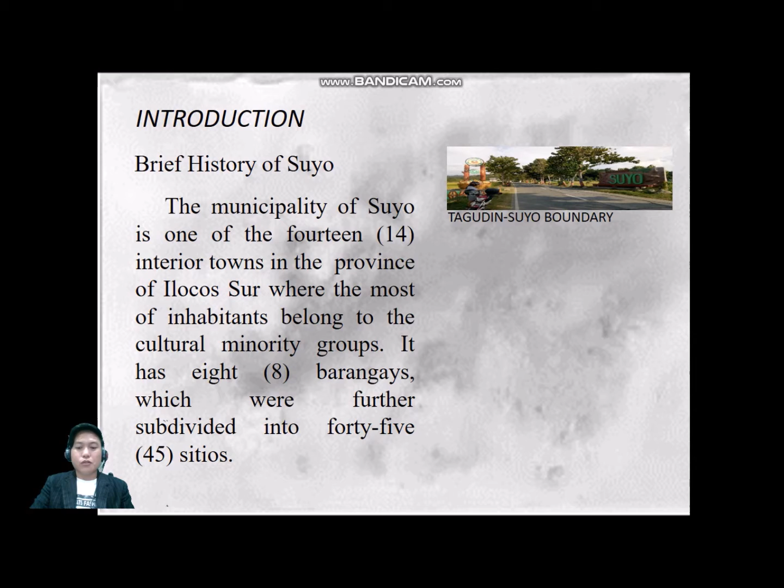But first, I will give you a brief history of Suyo, Ilocos Sur. The municipality of Suyo is one of the 14 interior towns in the province of Ilocos Sur, where most inhabitants belong to the cultural minority groups. It has 8 barangays which were further subdivided into 45 sitios.

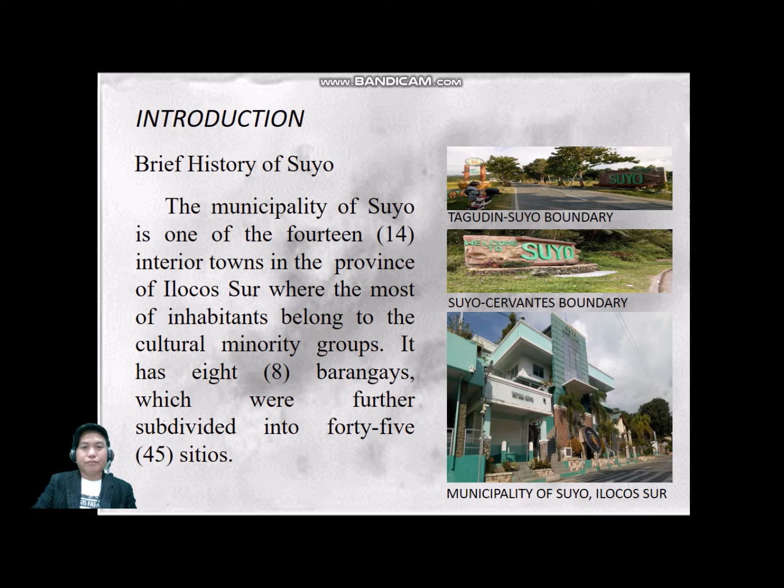Namunganayan is an Ilocano word for origin. It is the term used to celebrate the yearly town fiesta called the Namunganayan Festival, where different barangays in the municipality participate. It is an event where the native Bago tribe show their culture, tradition, and arts.

The project entitled Namunganayan Eco-Cultural Sports Center: Integration of Human Science, Nature, and Arts, is a place where athletes of the different school divisions and tourists are merged together in one place for sports competition and entertainment, and for tourists to discover and know more about Bago tribes, arts, and culture.

This project is designed to promote sports excellence, encouraging both amateur and professional athletes with its new facilities and training environment. It can help every athlete in training hard and improving their skills for higher competence in global and national competition.

Design focus. The project aims to provide a sports center that will house sports facilities with an application of the innovation of biodesign, architecture through nature, science, and creativity, with a secondary approach of passive cooling and active ecological restoration. Passive cooling aims to maximize natural ventilation, minimize energy consumption, and reduce carbon footprint produced by artificial ventilation such as air conditioning systems.

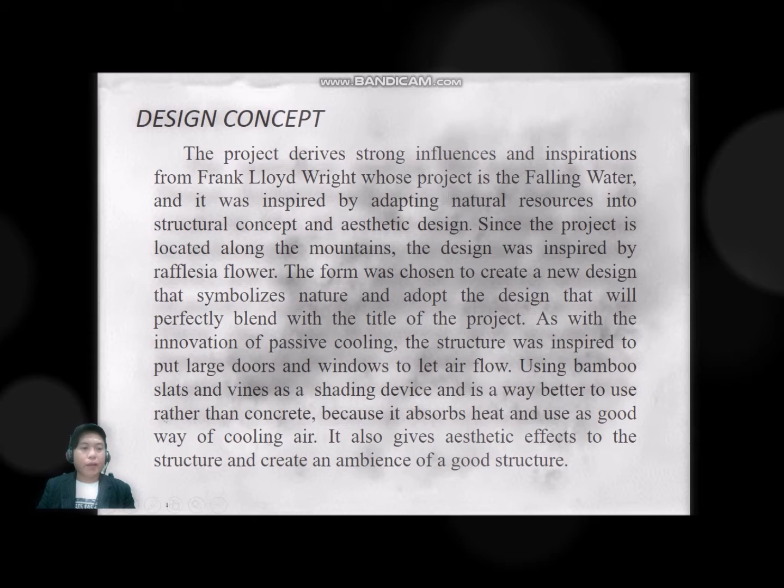Design concept. The project derives strong influences and inspiration from Frank Lloyd Wright, whose project is the Falling Water, inspired by adapting natural resources into structural concept and aesthetic design. Since the project is located along the mountains, the design was inspired by the Rafflesia flower. This form was chosen to create a new design that symbolizes nature and blends perfectly with the title of the project.

As with the innovation of passive cooling, the structure was inspired to put large doors and windows to let air flow, using bamboo slats and vines as a shading device, a better option than concrete because it absorbs heat. It is a good way of cooling air, and it also gives an aesthetic effect to the structure, creating an ambience of a good structure.

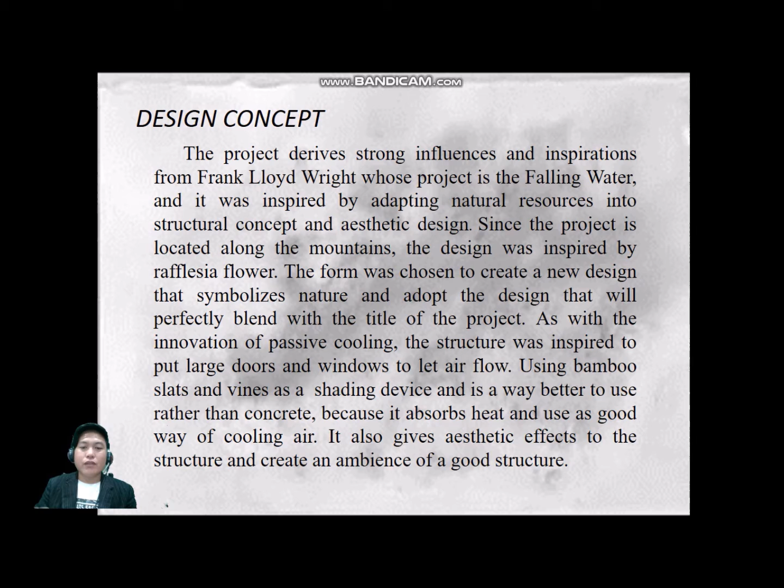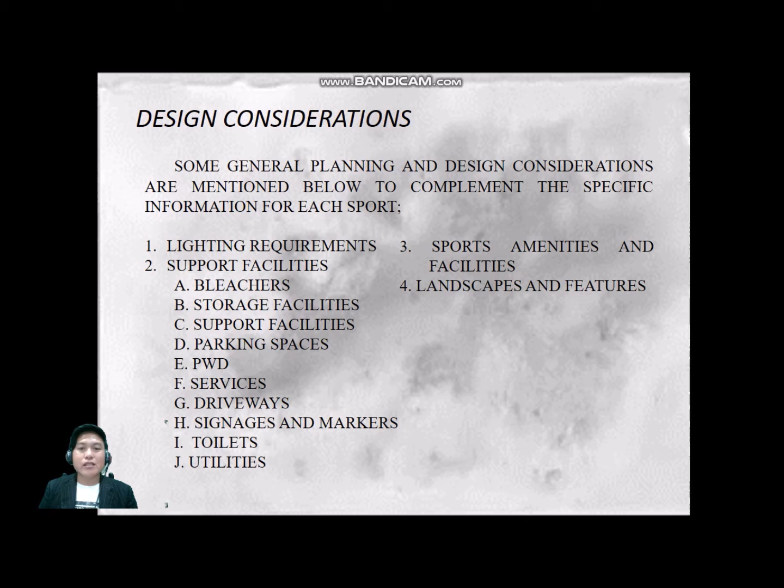Design considerations. Some general planning and design considerations are mentioned below to complement the specific information for each sport: Number 1, lighting requirement. Number 2, support facilities, including bleachers, storage facilities, parking spaces, PWD toilets, services, driveways, signage and markers, toilets, and utilities. Number 3, sports amenities and facilities. Number 4, landscape and features.

Design strategies. Using bio bricks or bio blocks for exterior and interior walls helps eliminate heat and produce a cool atmosphere inside the building. Large window glass with louvers above creates better lighting and helps provide natural ventilation. Using ecological materials like stones can lower the huge demand for housing, creating a shortage of conventional building materials.

Design philosophy. The design must reflect the practical and aesthetic in business, but above all, good design must primarily serve people, by Thomas J. Watson.

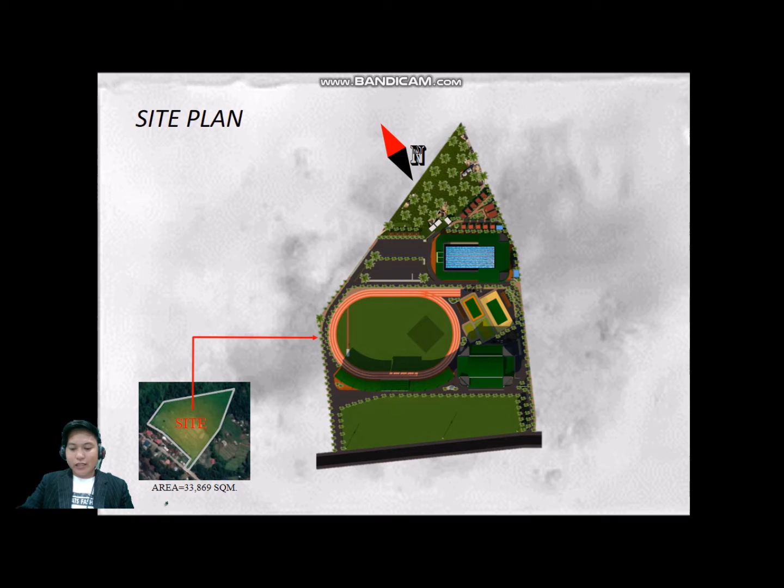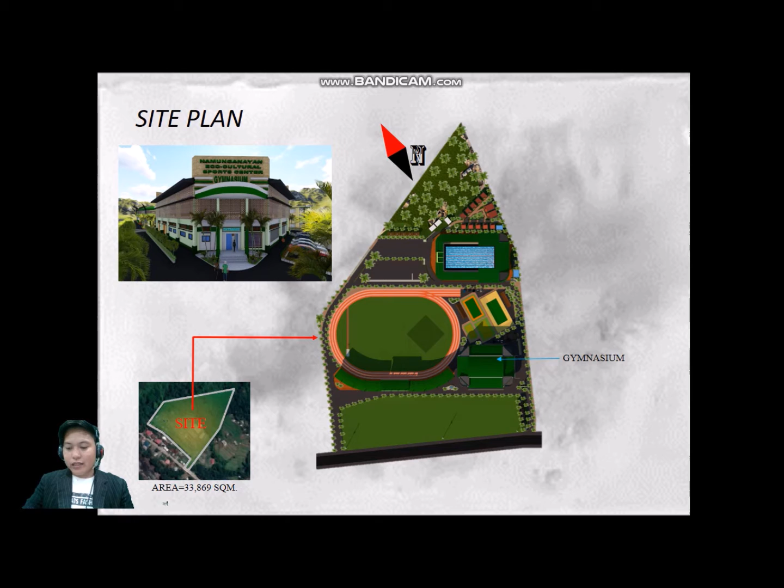Site Development Plan. The site development plan is arranged according to user behavioral analysis. The main entrance is located in front along the highway. As you continue going inside the sports center, you will see a water feature with signage of Namunganayan. The gymnasium is located near the entrance with a 4-corner entrance because it is the most used facility, and at the right corner is the admin building.

The stadium is located behind the gymnasium, facing northeast to prevent the heat of the sun while it reaches noontime. Facing northeast is also beneficial to the residents near the sports center. Trees between the site and residential areas are also placed to absorb heat and serve as noise reduction and insulation.

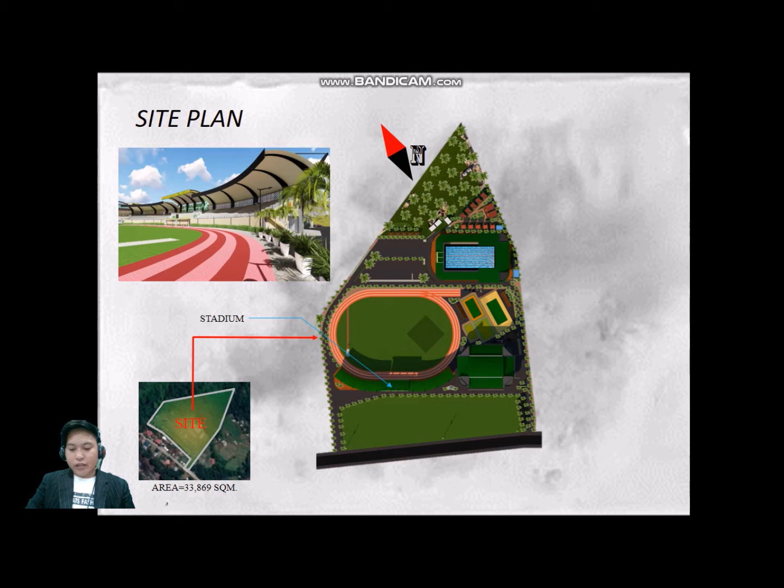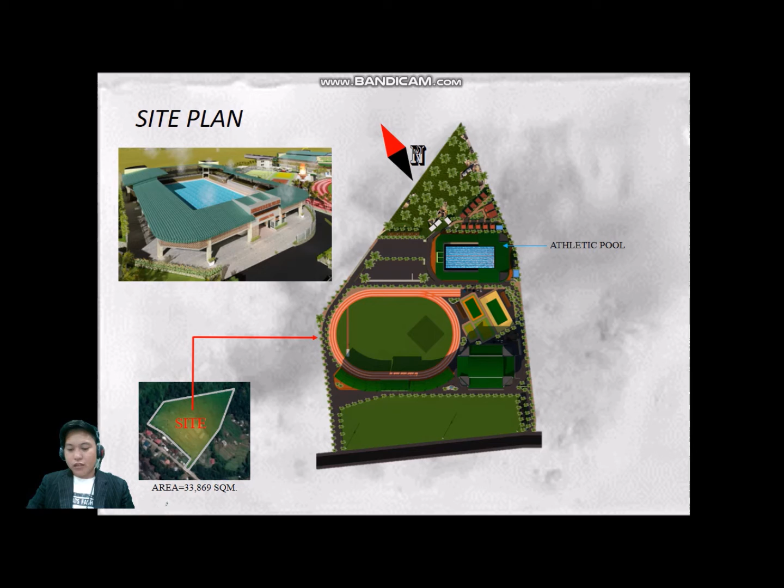Courts and fields are located at the middle part of the site. Athletic pool is located at the upper layer of the site, and parking spaces are centralized to prevent walking hazards for pedestrians. Cultural village and cultural park are located at the third level of the site, far away from active and crowded spectators. Water tank is located at the highest point of the site to supply water needed without using technologies, reducing energy consumption. Driveways are located along the sides of the site for the safety of pedestrians.

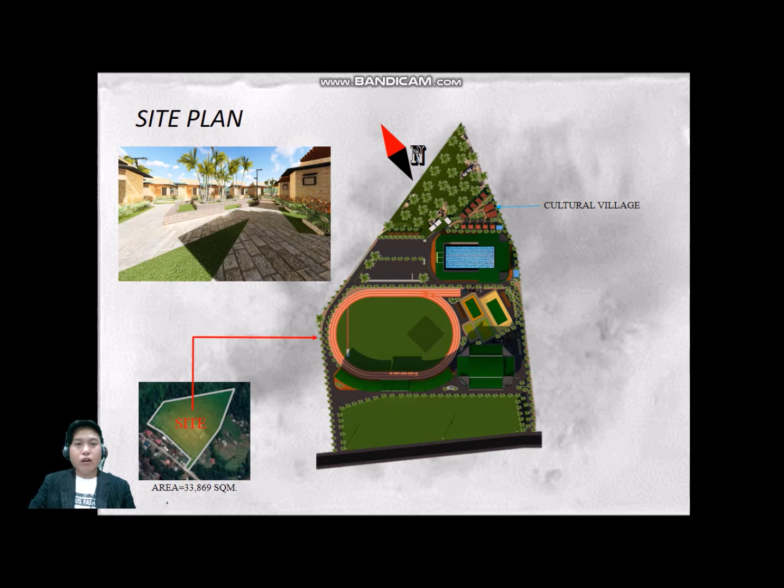This is my site analysis.

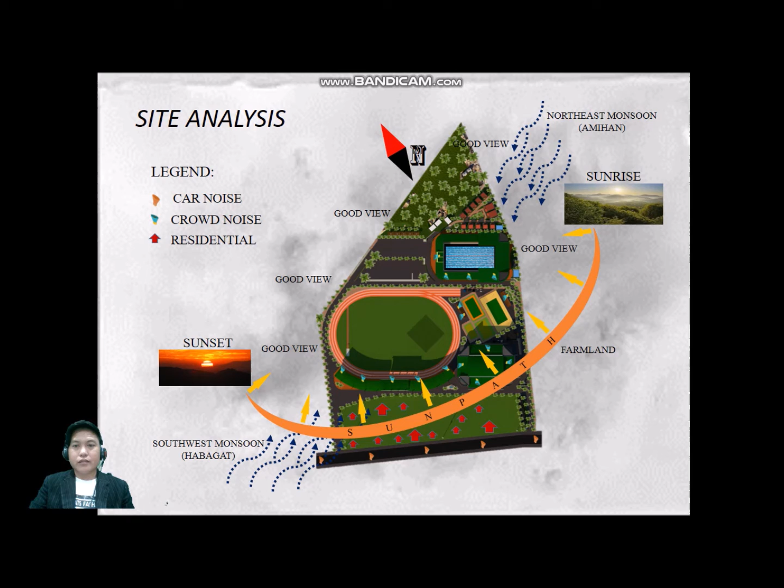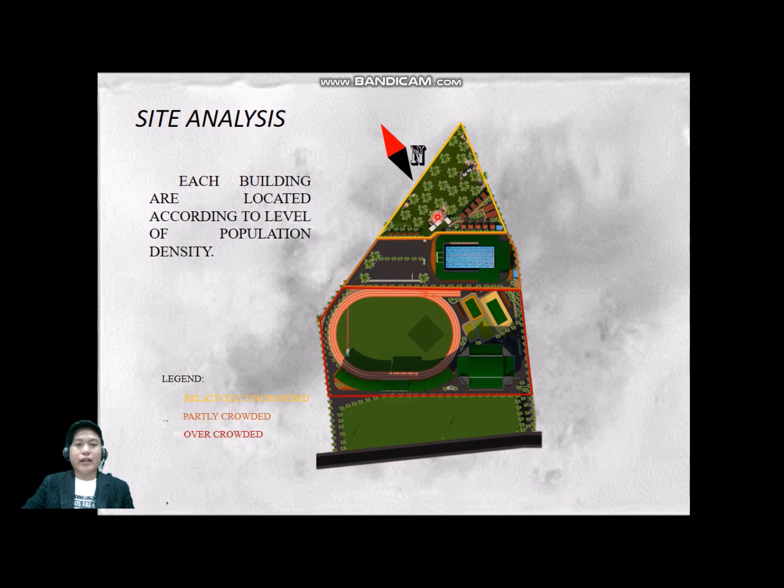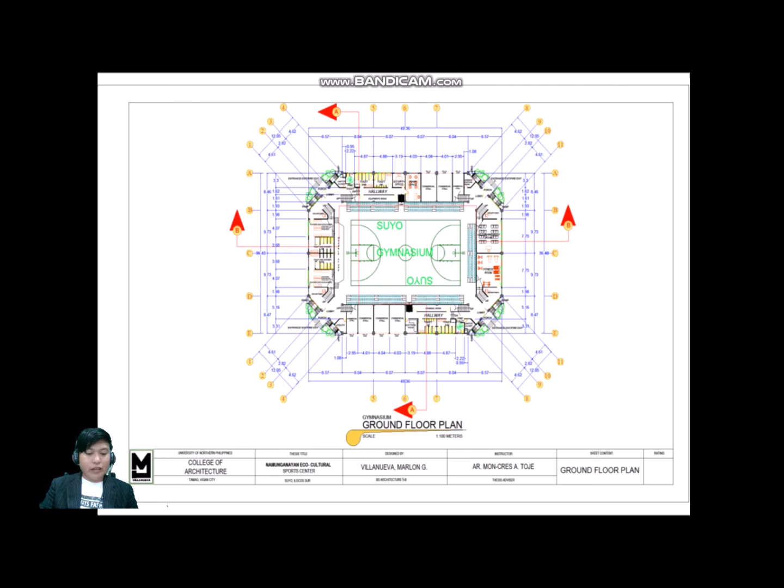Now let's proceed to the floor plans. First is the gymnasium ground floor plan. We have here 4 main entrances that also serve as exit and fire exit. Below the bleachers, we have commercial spaces, office, storage, toilet, fitness room, breakout room, locker room, lobby, utility, control room, electrical, and janitor room. We have also movable stage, telescopic bleachers, and a standard size basketball court. We have also 2,500 seating capacity bleachers, including the upper bleachers.

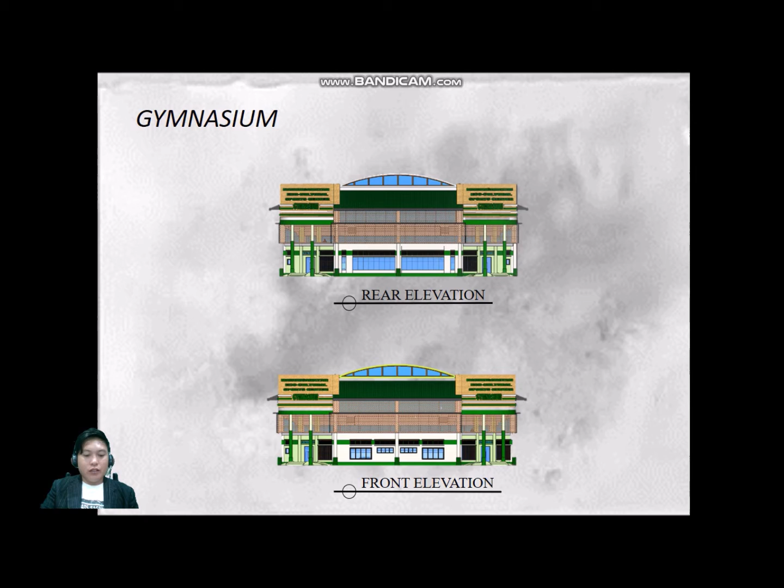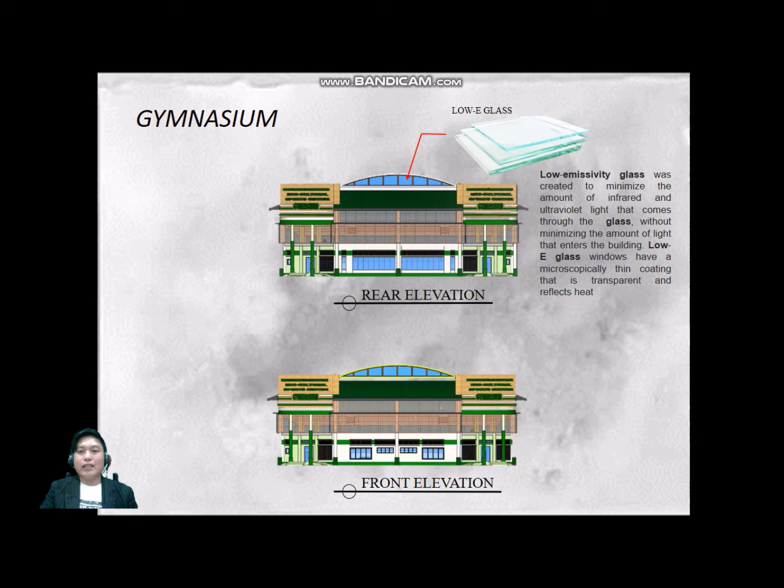Now let's proceed to the elevation. In here, it shows the materials and innovation used in the building. The first material is low-E glass, or what we call the low emissivity glass. This was created to minimize the amount of infrared and ultraviolet light that comes through the glass without minimizing the amount of light that enters the building. Low-E glass windows have a microscopically thin coating that is transparent and reflects heat.

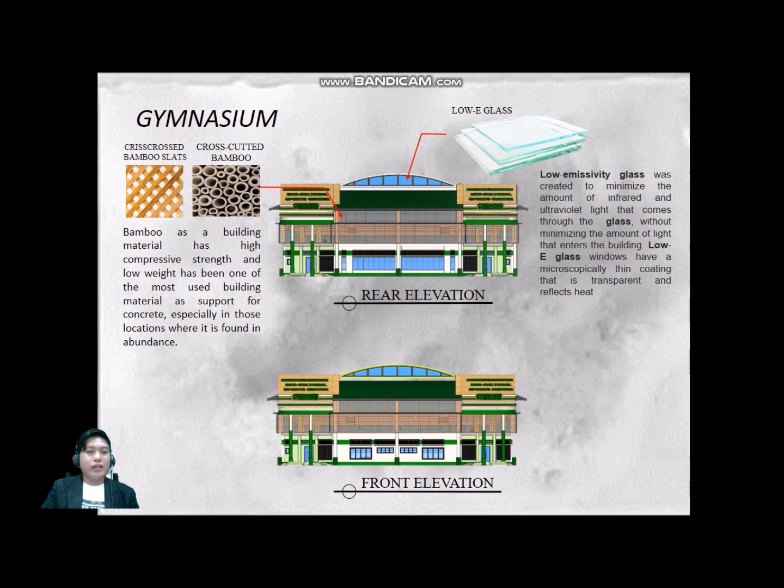The second material, and part also of my innovation, is the crisscross bamboo slats and the cross-cutted bamboo. Bamboo as a building material has high compressive strength and low weight, and has been one of the most used building materials as support for concrete, especially in locations where it is found in abundance.

The third material is bioblocks. Bioblocks also regulate moisture very well, absorbing and retaining excess moisture that they later release, thus regulating the natural climate of interior spaces. Further benefits of bioblocks are 100% sustainable, 100% recyclable, and 100% natural and bio-based.

The fourth material is natural stone bricks. Stone bricks offer greater insulation and temperature control. It is usually found along the river.

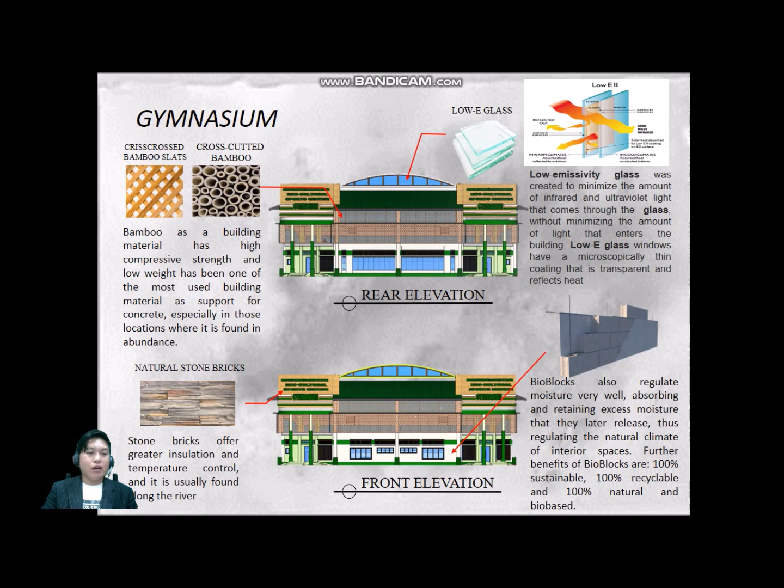I use crisscross bamboo slats. Crisscross bamboo slats are attached to a wooden frame and used as a shading device, insulation, and noise reduction device. It also gives an aesthetic view of the wall. Cross-cutted bamboo is also attached to a wooden frame. It works the same way as crisscross bamboo slats.

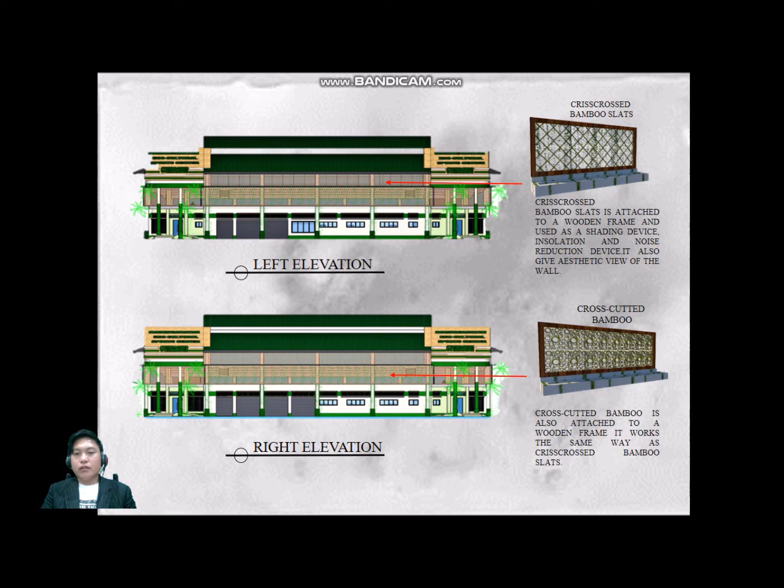And this is gymnasium perspectives.

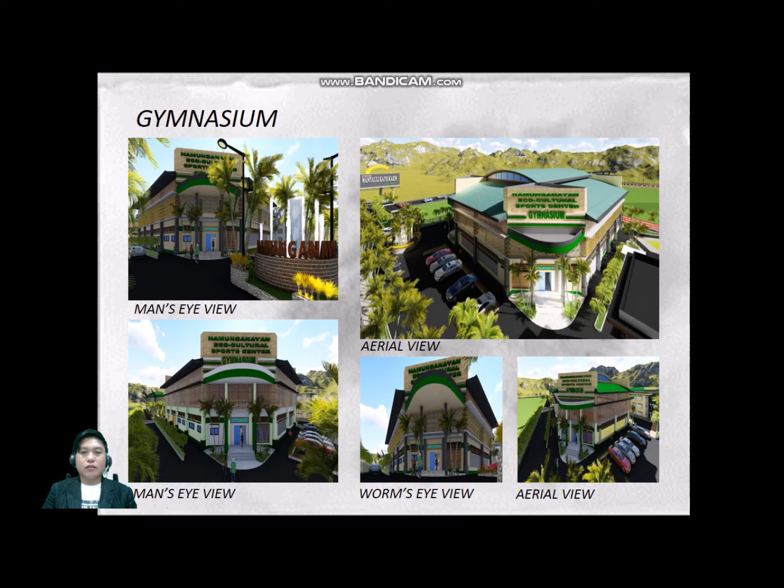Now let's proceed to the stadium floor plan. Ground floor is composed of lockers, toilet, electrical, storage, control, garbage handling area, office, utility, and stair. We have also dance room, music room, billiard and pool room, chess room, and table tennis room. On the middle part of the bleachers, we have stage, backstage, and dressing room.

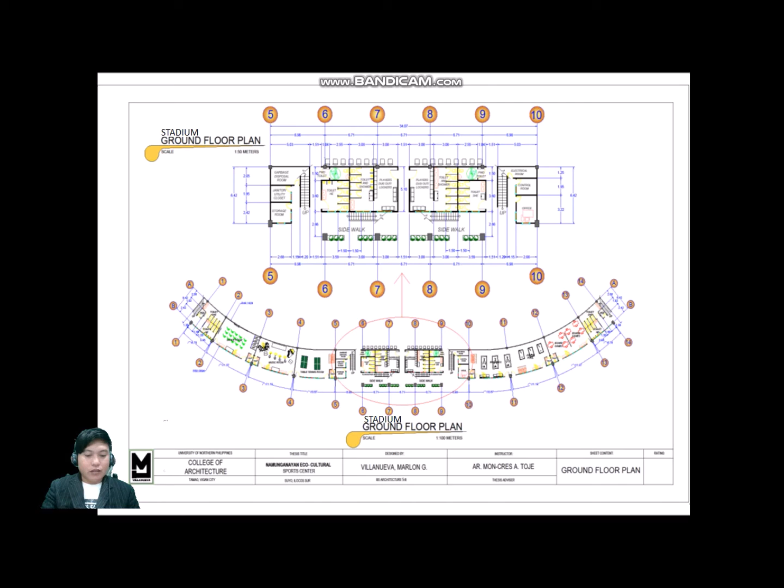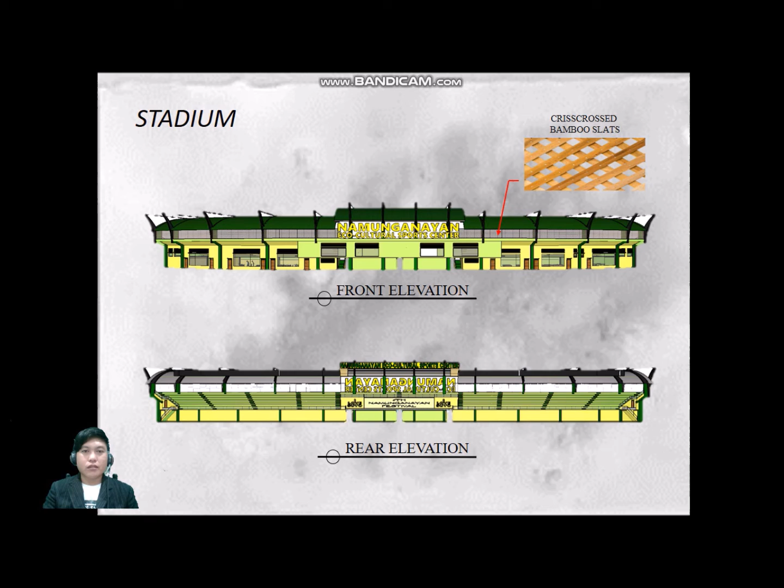In here, I also use the same materials and innovation that I use at the gymnasium. I also use crisscross bamboo slats attached to the beam, as blinds. I use also low emissivity glass. I use also wooden louvers.

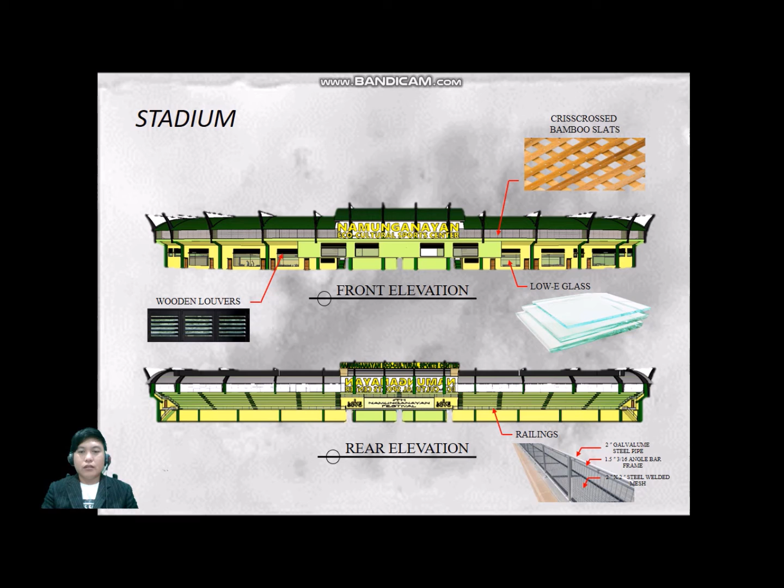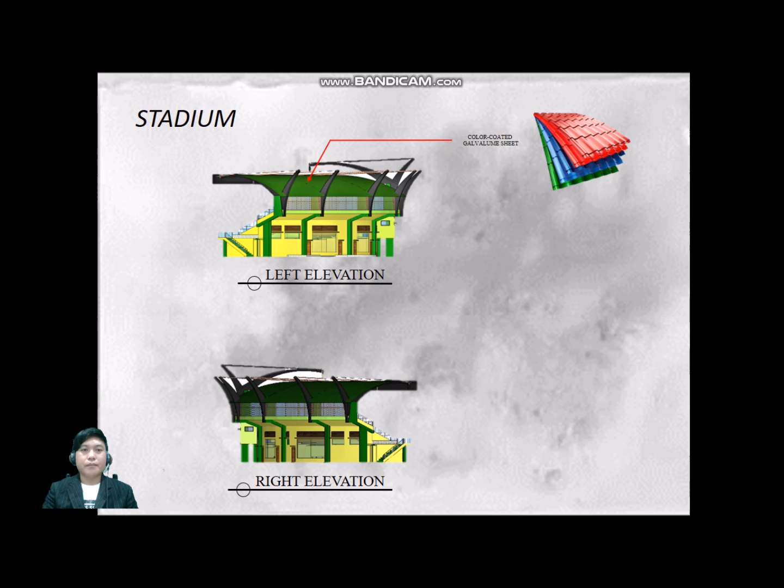Color-coated galvalume sheet, or a pre-painted galvalume sheet. Customized high-strength I-beam for the truss. Galvalume steel pipe. And crisscross bamboo slats.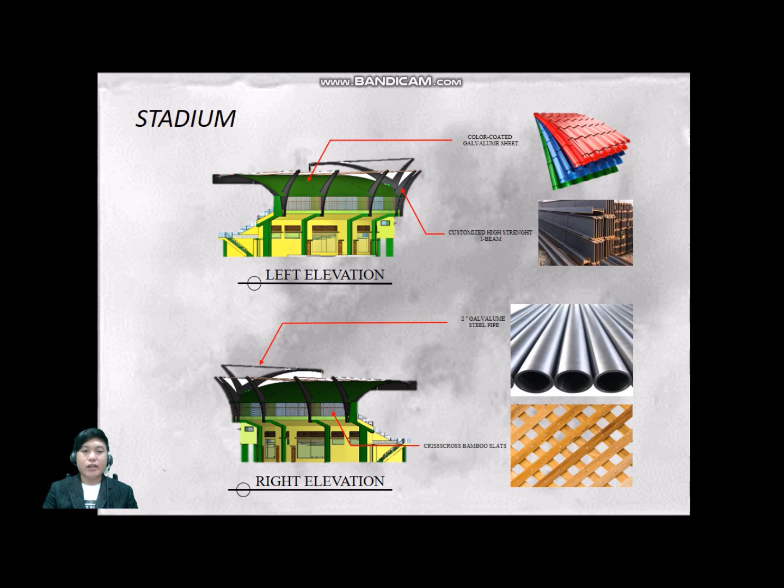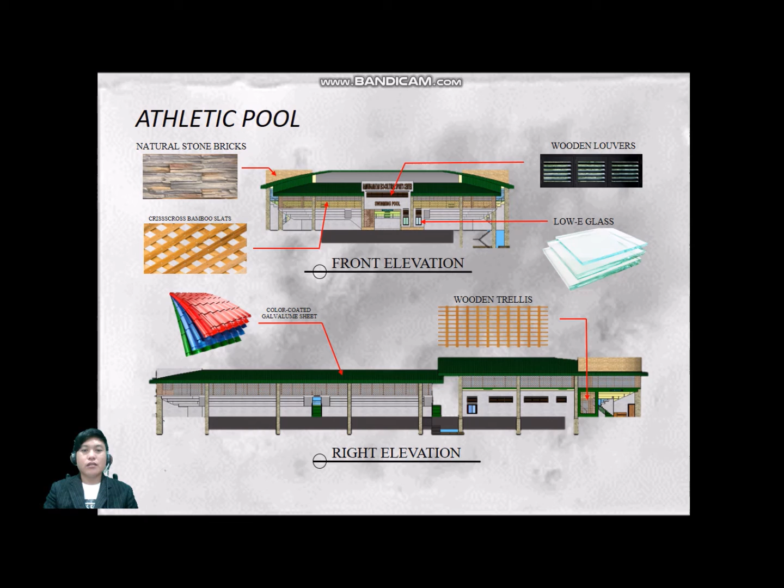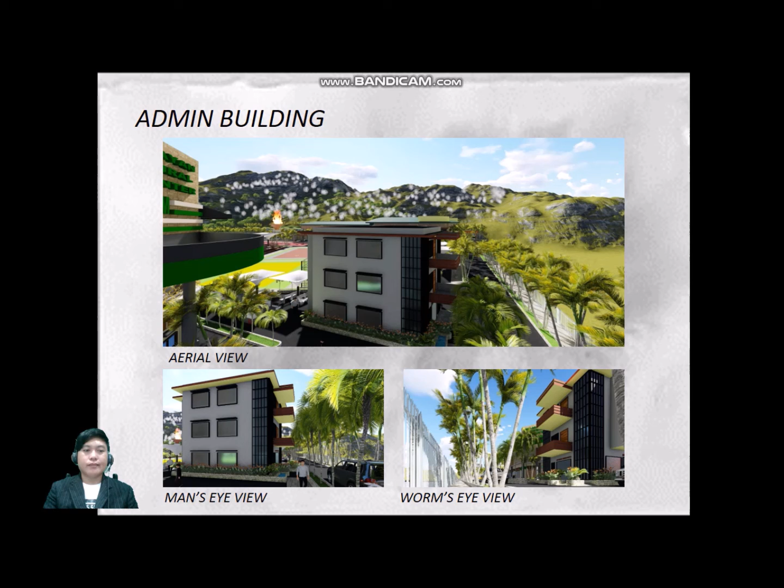Conclusion and recommendation. After several months of thorough research, it was found out that the design of the assembly places, especially the project, which is the Namunganayan Eco-Cultural Sports Center, can be as sustainable as possible, so that it can lower the utility and energy consumption in conformity to the global problems, global warming and deterioration of sources.

Biodesign architecture through nature, science, and creativity may be applied, with the approach of passive cooling and active ecological restoration, which can maximize the efficiency of the building. Ecological concept of cultural architecture is one of the best applicable designs that can be applied to this type of development in consideration of the climate of the locality.